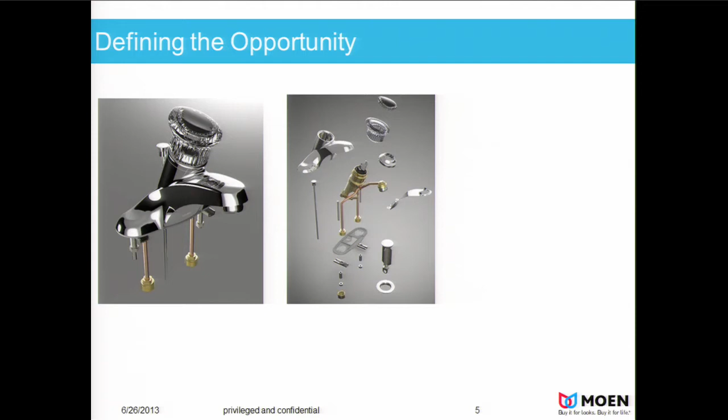So the opportunity itself starts with the product, right? This is just a picture of one of our more simple single-handle lav faucets. And it's all lovely and all that. But in the end, it turns out to be parts, right? This is the challenge in a manufacturing site - it's a bunch of parts. And then when you get to the plant floor, it becomes a bunch of part numbers that all have to be ordered, stocked, moved, touched, counted - right thing at the right place at the right time. Otherwise, I've got a problem.

And I can tell you in this space, this is one of the business drivers that got us into ME. I don't know what your business is like, but in our case, we had a challenge with, as good as we thought we were, a challenge with missing and wrong parts. Because invariably, there's about 40 or 50 parts in a faucet box or a faucet assembly. And whether it's a bicycle or a cabinet or a faucet, you get that box home and open it up and there's one missing, right? That's not a good thing. Now you're cheesed off, your significant other's upset.

When are you going to put the faucet in? Now you got to go back to the store, back to Home Depot. So that's your time and energy. You go back to Home Depot and say, I want to return this. Now that's your time, their cost. They have to put that away, they have to handle it, they need to ship it back to us, and they're not happy with the return process. That's one part in one box for one consumer, and if we do this over and over, that's a real problem.

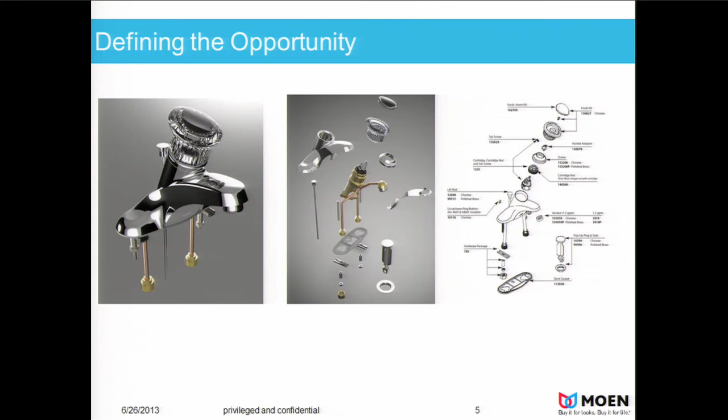So generally, our challenge was, how do I eliminate, literally eliminate, missing and wrong parts in the manufacturing process or the assembly process? So our initiative, our lingo, was zero defect line. Zero, not kind of good defect line, zero.

Just an order of magnitude - the gentleman who prepared this went a little overboard, but the two key data points, I think, are: on average we're bringing over 1 million parts a day to the floor. Component parts being pulled from the warehouse, component parts coming in the door to the assembly cells. There's over 1 million parts every single day coming there.

I'm going to skip some of this because I think it's a little too much detail. Production orders, about 3,000 bringing on the floor. There's about 150 places we stock things on the floor. We have about 55 discrete assembly cells on the floor, 500 changeovers a day. And on average - actually we're running north of this right now - about 40,000 faucets go out the door. So any given day in the assembly plant, over 1 million parts come to the floor and over 40,000 faucets go out of the building.

What's the chance you could miss a part any given day and then you're the cheesed-off consumer at home? It's not zero, right? So we needed some help to do that.

And the other dynamic here is not only that simple physical handling of the parts, volume generally is up. As the economy slowed in '07, '08 and '09 and construction dropped, we felt that, but it was going up and it's sure as heck going up now. More products, more changeovers, more unique components. I'm sure this is relative to your business too - it's up, up, up, faster, faster, more. So how do we handle that?

And our goal, I think generally, is what we were striving for, that ME was really well positioned for, was invincibility. We wanted to be perfect. We don't want to be kind of good. We want to stomp the competition off the planet. So how do you do that?

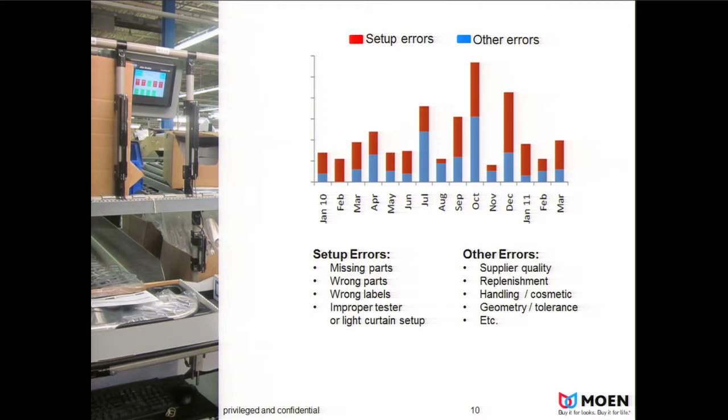But there was enough opportunity here to drive out the red and make it go to zero that we decided to go after ME. Now the other reality we believed in our manufacturing process was the equipment on the line itself, just the equipment itself doesn't get you where you need to go.

So we have scanners and printers and weigh scalers and labelers, but there's still this human pair of hands that had to take ERP instruction and say, this is what you're making today, here's how you need to set up the labeler. Now I'm making this SKU today, here's what I had to do to the label scale. So in addition to all the component parts being there or not being there, there were certain physical setups and programming that had to happen down the line as the product was made.

And anytime you get humans involved, you got some subjectivity and some error there. So having that capability alone was just plain not enough.

So in our case, we were generally shooting for two things. One was reducing in-market quality issues. So that's our lingo for there's a problem outside our walls. We've released something out of our business and out of our building that causes a problem in the field.

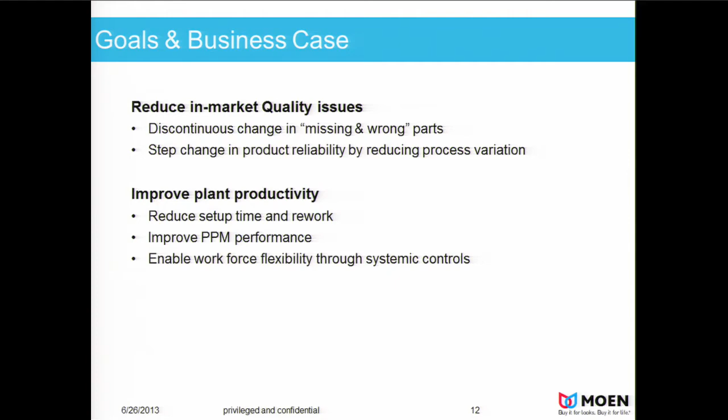And generally, it's either the cheesed-off consumer that opens it and says I don't have the right stuff, or it doesn't work when you install it and it floods your kitchen, and generally that doesn't make you too happy either. And then also plant productivity, the actual finances and the cell productivity and manufacturing productivity in the plant. How do we cut some time and improve that productivity process while getting the quality?

Now, part of the challenge of anything like this is justifying it, because we were not an ME customer at all before this sort of initiative came around. It cost money to license, we had to buy some hardware, we had to consume some of the IT staff.

And I'm sure you all get into this, but the way we were looking at it is, where do you draw the line on the business case, right? There are things that are quantitative and I can count them. Productivity on the line, I can go from X minutes of setup to Y minutes of setup.

Then I've got cost of quality, that I've got not only the PPM in the cell and inspections and quality hold and rework. We want to get rid of that.

But there's also sort of subsequent quality issues like in our call center. So the more missing and wrong I send out the door, the more calls I get in the call center. Hey, you knuckleheads, you forgot to send me a part. So if I fix it in the cell, conceptually that should drop too.

But then you get out into, well, the value of visual KPIs and visual where do I stand in the quality, how do you quantify that? Sometimes you can. Creating a mobile footprint, future capability of ME.

So we decided to draw a line basically at the quantitative level of the case. So there's all kinds of fuzzy and esoteric things we could do later. It's good soft stuff. But in general, chief finance officers tend to want ROI based on payback, so we focused on what we could count and what we could quantify in the plant.

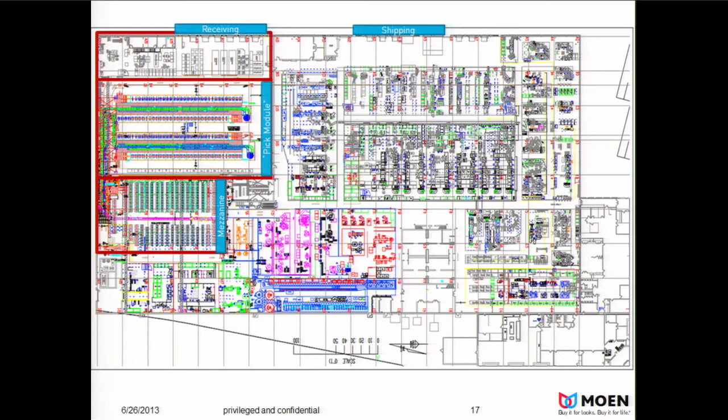This is an aerial view of our assembly plant. The only thing I want to show you here is generally parts get stored in the back in the warehouse, or dropped right to the floor, or I pull them out, pick them and bring them to the floor, and then I ship out the door.

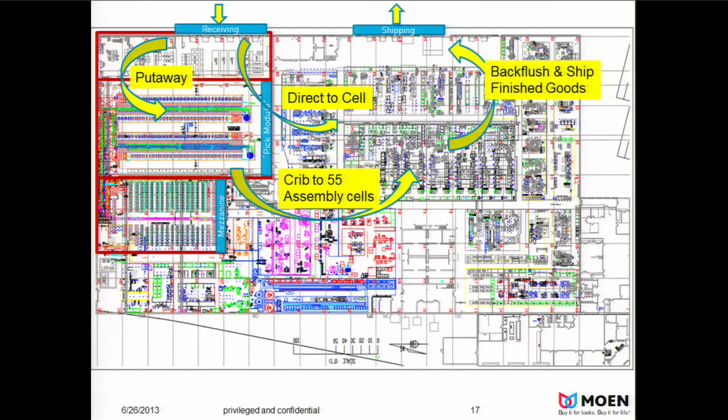But in our case, just to be clear, because I think you could do this in a variety of ways, in our case, ME is in the manufacturing cell itself. So we said we had roughly 55 assembly cells. ME is inside that cell. That's where we chose to put it, and that's where it manifests itself and people interact with it.

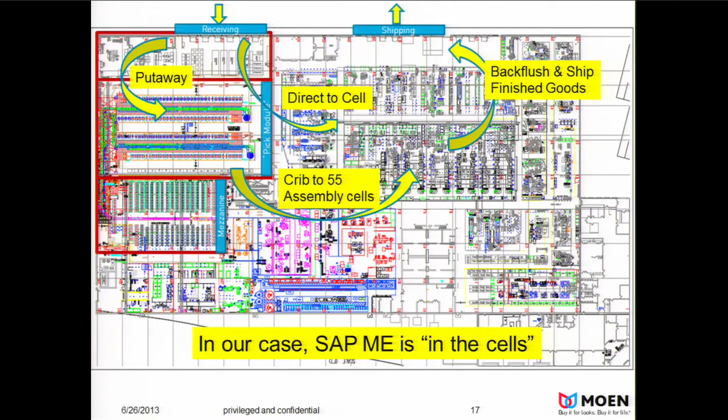So looking at the solution, I forget the company's name, I apologize. The medical company that did a similar one, they had a very similar thing. To me, this is the play out of the technology now - what does the solution set look like? There's at least 4 layers involved here. ECC is the master. We've been on ECC for over 10 years. That's our core business system. That's generally where all the truth emanates from, and it's certainly where the master data sits.

But now we're down into the ME-MII layer. MII is the technical connection, right? It's the way I transmit and pass data back and forth between ECC, the master, and ME, the shop floor system. So that's at least 2 layers of technology.

PCo is the short version for plant connectivity. That's another layer of technology that allows the SAP layer to talk to the PLC on the machine. So in the places where I'm driving instruction into machinery, I had to make that connection and do that kind of talking. And then also at the PLC layer itself, in the machinery and in the tester and in the label, et cetera, there's an RSLinx layer of software too. So as we're shooting for this business outcome, now what does it really turn into, and how do you do that? There's at least these layers of capability involved in making the information flow down and up appropriately.

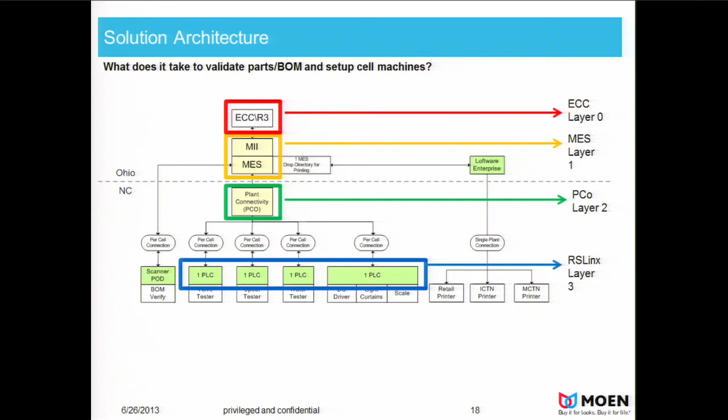The other thing I'd tell you too, just for general awareness, if you're thinking about getting into the ME space is - and I'm not going to talk dollars in any way - SAP basically licenses ME based on resources. So the number of devices and the number of ways you're going to hook into your plant. The numbers themselves aren't necessarily important, but we had to take stock of how many things are we going to talk to? How many things are we going to interact with? If that footprint is like this, the cost is X. If that footprint is like this, the cost is going to be Y. So one of the learnings we had is, it's not just a software licensing thing, it's more like a capability footprint. The more you use it, the dollar value goes up, and that kind of seems to make sense.

One of the other decisions we had to make, and this is where we got ourselves a little bit tangled up when we first started, is what was the first version - it's my friend Carol here, what was the first version we started with? 5.2. It wanted to just natively generate and manage itself at an individual discrete serial level. Every single faucet, in our case, every single faucet that went down the line had interactions and data and setups, and we didn't want to do that.

We want to do it at sort of the batch or the run level. So we are a discrete manufacturer, we use run schedules. So I'm going to make 600 of these over the next so many hours, and I'm going to make 400 of these. So we said, look, we want to do the setup at the big level: 600, then 400, then 700. I don't need faucet by faucet by faucet. So we had some customization built. Eventually we upgraded to a newer version, 6.0, that tended to do this a little bit better. But this is very much a business decision. This isn't a technical decision.

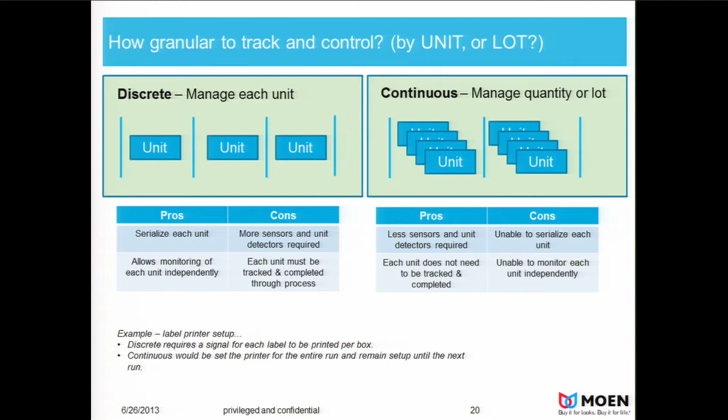So I start with some basic things, and go to step 2, 3, 4, 5, 6, 7, 8. At the front of the line, today we're still using a paper traveler that goes down the line, and it contains run schedule information and SKU information. What am I about to start now? I'm going to make 600 of them over the next couple hours.

As the paper goes down the line, the operator in the cell has a very simple UI on their handheld RF gun that says: at this operation, I need these parts in front of me because those are the ones I'm going to use in this step. I start with these parts, then I need these, then these, and step by step down the line I need to make sure the right parts are there. Not too few, not too many, the exact right ones.

So what we're doing through ME is validating the bill of material against what's physically right here. I scan, and I'm going to get one of two results. I'm scanning the part box, cha-ching, scan the part box, cha-ching, scan the part box.

One result says: this part number is not a BOM component, please remove it from the line. So there's instant notification to the cell operator that you've got the wrong part. It's kind of like an andon cord thing—don't work around it, stop, get that out of here, that does not belong here.

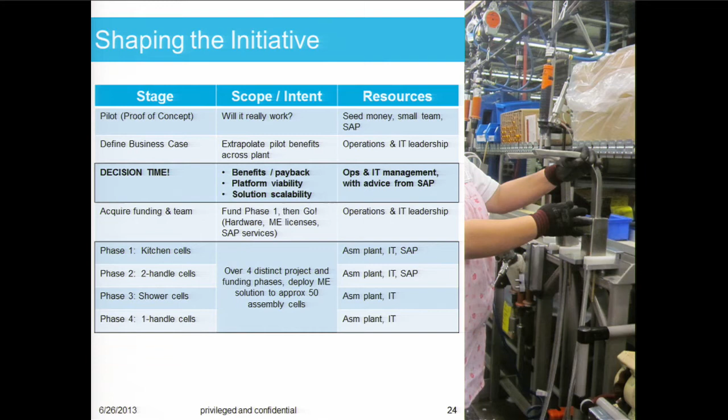And then the solution scalability is, can I scale it through the entire plant? We started in one little cell. It works great, but can I take it to 55 manufacturing cells and make it work like this every day, all the time, as well as the other plant, as well as the other plant? And we satisfied ourselves our case was yes.

So we found that factually over time, we were taking less time to verify materials. Before, it was a human being having to stand there with a clipboard, now it's like scan, blank, scan, blank. So we've dropped it. It doesn't go to zero - I still have a physical process to do that verification, but it's much less.

They're stocking parts on the line, right? So I still got to put parts in the cell, feed the cell. Here's what I'm making today - ME doesn't do anything with that. I still need somebody dragging parts from the warehouse, putting them in the cell, and staging them. ME doesn't drop a penny off of that.

But other things like label setup and light curtain and some of the equipment, largely that goes to zero. It's one scan and it's done. Before I had to touch a keyboard, program it, make sure I put the right things in, and then move to the next one and do it again. Now it's like zap, zap, zap, and I'm finished.

So there was some discernible and visible time savings in setup. And when you scale that across, the math is, I do that every day, 500 times a day, across all days of the week. Eventually the math and the money start to add up in terms of savings and time savings.

And also, this is the other byproduct in the upper right, where we believe we also have savings - I don't have so many containment exercises. Holy crap, we let something out of the cell that's wrong. Stop that pallet at the dock. Somebody has to do that, inspect that, take that apart. So the fallout of the problem also starts to go away, as well as the problem set itself in the cell.

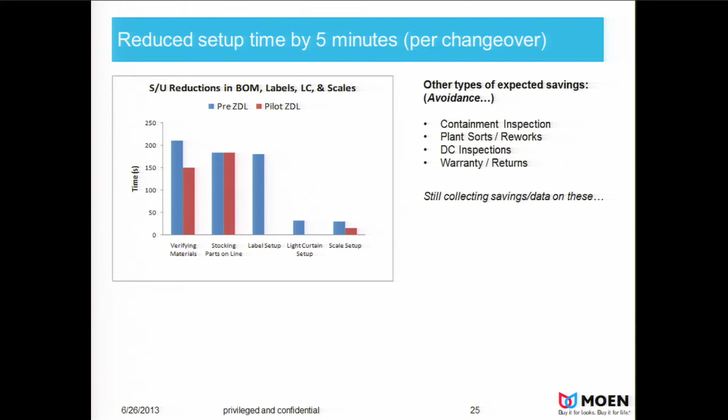So the go-forward business case. So far what we've done with ME, we've put it in, I forget the number, like 12 or 15 kitchen manufacturing cells - how we make kitchen faucets, there's about 15 cells. But then we have all the rest of the plant to go.

But remember that licensing model - remember that SAP ME licensing model. How many devices are you talking to? So as I go to different cells, I might have different machinery and different things to interface with. So we're having a little bit of a discussion about, look, is this either a flat-out ROI case?

There's no subjectivity. If you can't dollarize it and explain, if I give you these $2, I get $4 back—or is it just simply the right thing to do? When you look back at that PPM data, why would I not want to drive that through my plant? And of course, the right answer is it's a little of both.

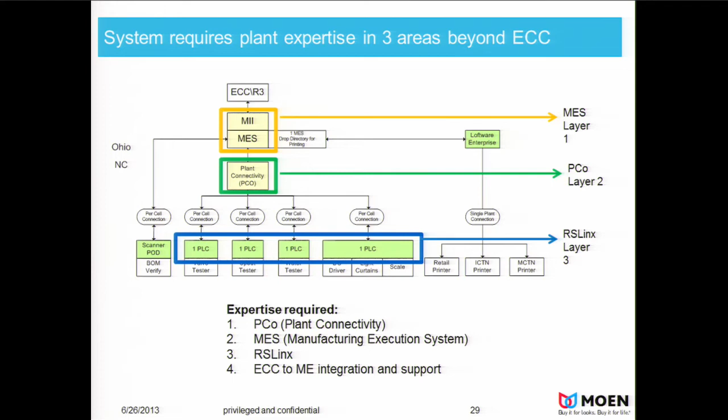Oh, it's not alive today. We found there's at least these layers of technology that have to be dealt with—PCo, ME, the RSLinx thing, some of the controls engineers do that, not IT actually, and some of the integration points.

But there's a whole new space of technology in your plant that wasn't there 10 minutes ago. That's clearly one learning. So without going through this in detail, the plant staff and with IT's help looked at what do I need, how fast do I need to get there? Because if I'm piloting and scaling up, I don't need to be expert right out of the gate, but I better darn well have a plan for when I hit the full plant—IT's ready, the controls engineer's ready, the manufacturing associates are ready. So it's the scale-up plan of skills, roles, and readiness that we took a pretty hard dive at, just to make sure we're ready, then how do we track to this?

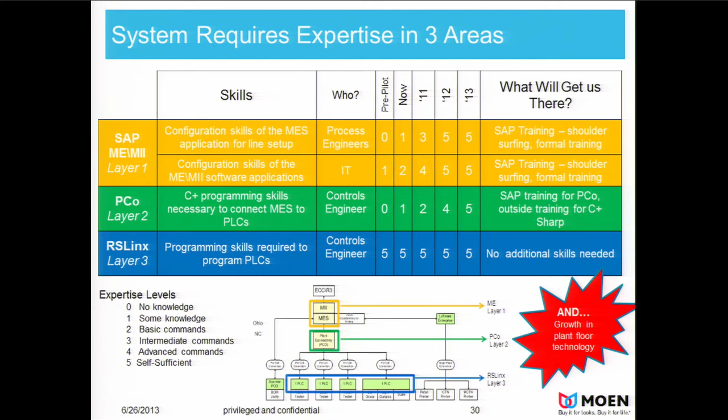And in the lower right corner, in addition to that stuff that says PCo and ME, you're putting more just sort of inherent base-level infrastructure in the cell. You might have more wires in the cell than you had before, more RF guns in the cell than you had before. So we tend to call those desktop or infrastructure people. But in addition to the application, I've got more technology in the cell than I had before too, so you got to account for that time-wise, resource-wise, et cetera.

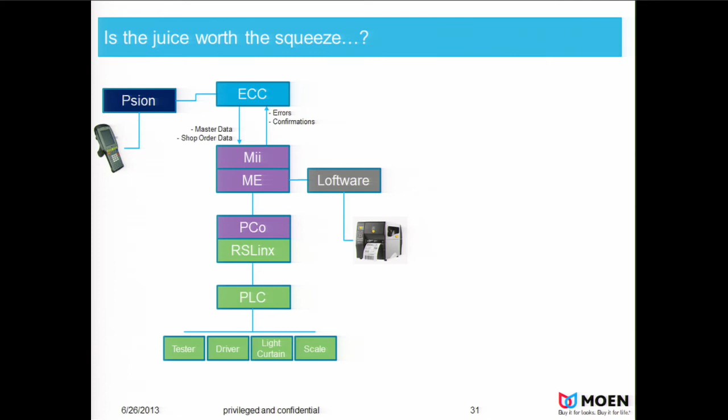This was an interesting question: is the juice worth the squeeze? So all this—stacks and interfaces and skill sets—to get two little blank screens. Is that worth it? And the answer is, of course it's worth it. So this is one of those where, on the surface, it doesn't look like much to the operator. But what I've heard in a lot of these other sessions is the emphasis on simplicity and sustainability. Like the 12 T-codes I've got to migrate my way through—that does not work on the plant floor. So having two little screens, scan, scan, scan, and I know when it goes blank, I did the right thing—that's the interface I'm after, even though it might take layers of technology to pull it off. So in our case, we believe the answer is yes.

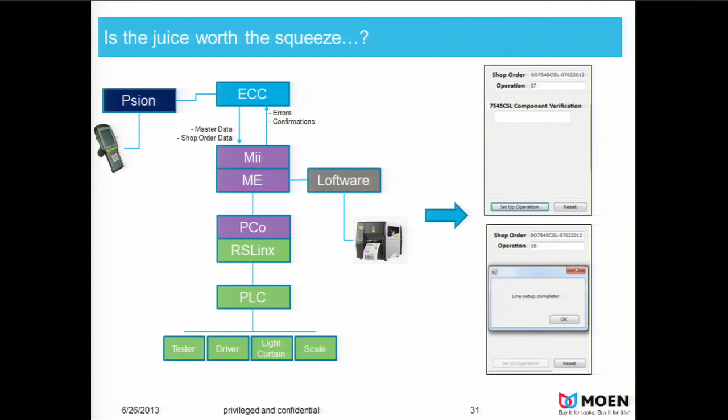But I don't want to be—at least this is Moen's mindset—I don't want to be dependent on that. We are all about self-sufficiency, but out of the gate, I need to implement and show benefit. Directionally, I want to get away from being dependent on every time I want to make a move, I need to open my checkbook. I don't want to do that. I want to own that in IT.

And clearly our emphasis, at least on the services side, was to drive it to zero. And frankly, where we are right now, just as a data point, this is a discussion we're having as we're ready to move out of kitchens through the rest of the plant.

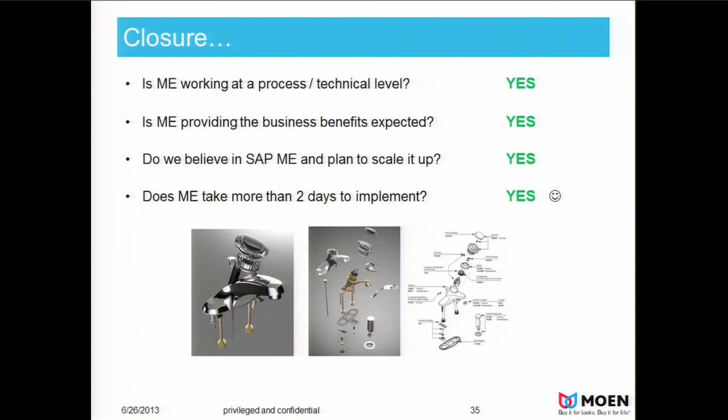So again, I draw your attention back to the parts problem. In our case, in our business, in this space, that's what we were shooting at, and that's where we applied ME first. And then we have a lot of other desires for ME, and we have a lot of other desires for MII. But in the end, there's nothing like you being mad at home because you're missing one part in a box. And if we make 40-some thousand faucets a day, that's a lot of parts and a lot of boxes. So that's my story.

I just wondered if you have any questions or comments. I kind of zipped through that. But in the end, it's working, and it's doing what we need it to do, and we fully believe in ME.

Questions? Yes, sir. Operator using ECC6 to do confirmation for waivers, stuff like that.

There are other, if I understand your question, let me try to restate that. Are they using ECC6? Everything else in the cell is ECC based. Whatever manifests itself in the cell, this validation and the equipment setup is ME driven, but largely everything else that goes on in the plant is driven out of ECC 6.0. Yes. And there's some BI displays and real-time things we put on the walls, but transactionally we still very much live in ECC.

Any other questions? Yes, sir. How large an IT staff?

You see the lady sitting next to you? That's the staff. No, I'm kidding.

Interesting. You clearly work in IT, right? How do I get more headcount, right? Our IT department in total is about 70 people. So for a billion-dollar corporation, we're about 70 IT bodies. That's like VP to the frontline associates. Trying to think how else I would quantify this.

Realistically, and this is one of the challenges, that's a very good leading question. When we did this, I wasn't joking, Carol, this is one of my associates, Carol Jones, was the team. So remember back to that pilot model. Let's try it. So let's not overinvest. I don't want to hire 18 people. I don't know if this is going to work or not.